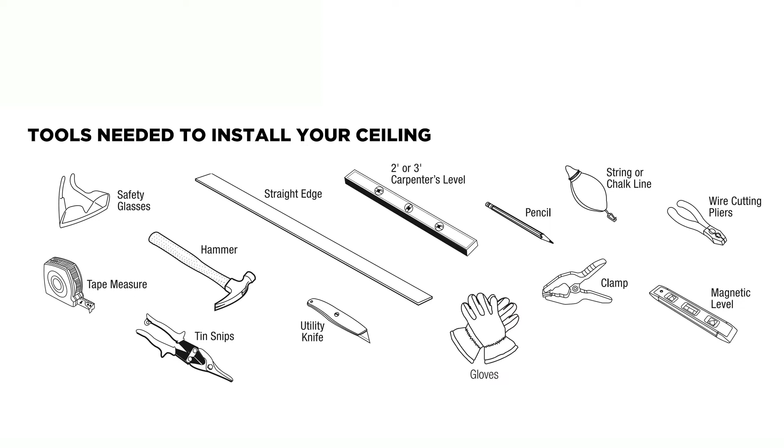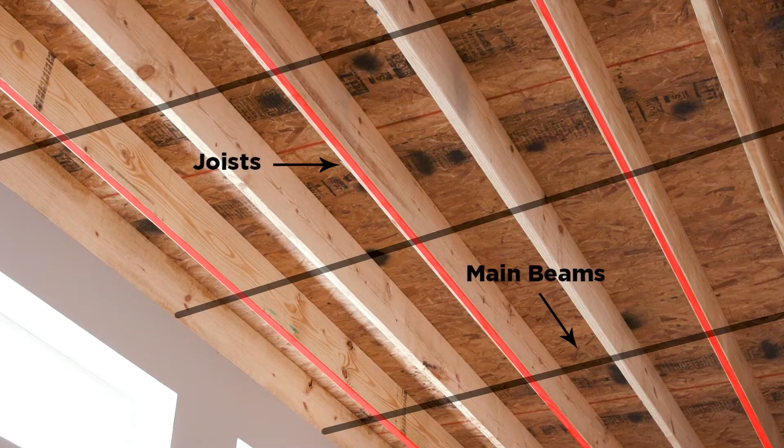Site preparation. Before beginning your installation, you'll need to identify the direction of the joists. Main beams typically run perpendicular to joists. If you have existing drywall, here's how to identify joist direction. Locate hidden joists using a stud finder or by tapping on the ceiling until you hear a solid thud. Mark this location. Repeat to locate remaining joists. Mark joist locations with chalk lines.

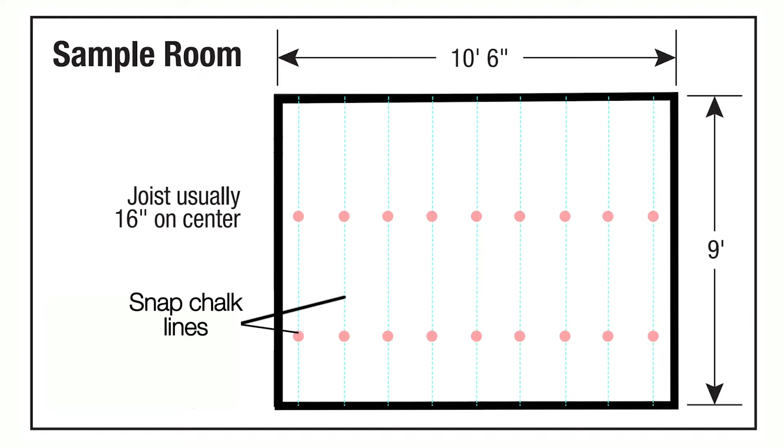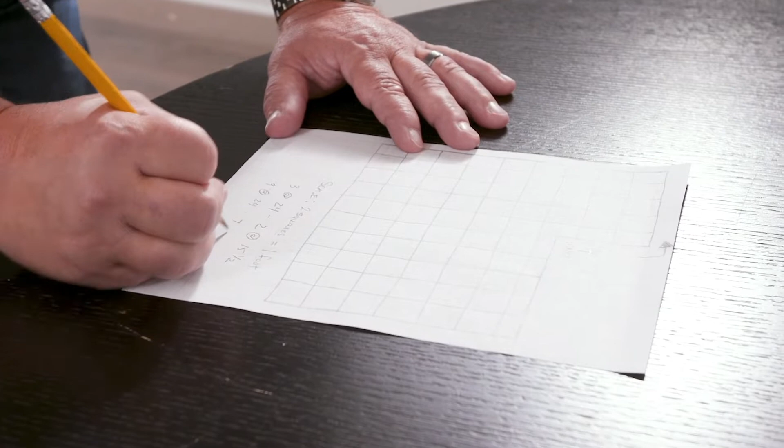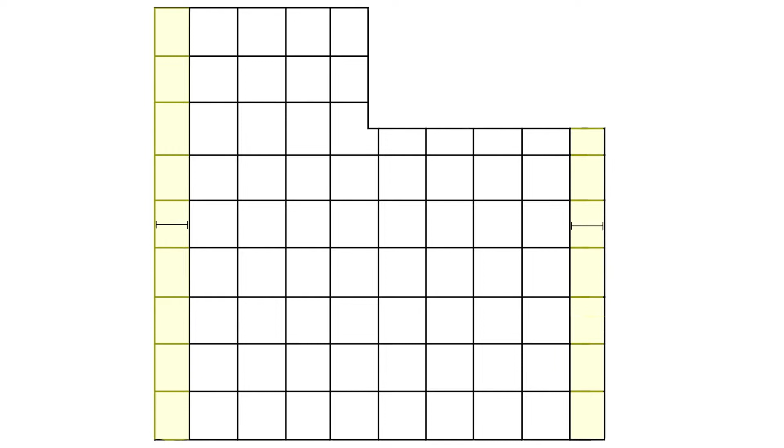Planning your layout. We recommend creating a layout of your ceiling before beginning your project. Visit the drop ceiling calculator on our website for additional guidance. For the best appearance, border panels should be the same size on opposite sides of the room and as large as possible. Use your room dimension and the following formulas to plan your space. Pause the video here to review the worksheets.

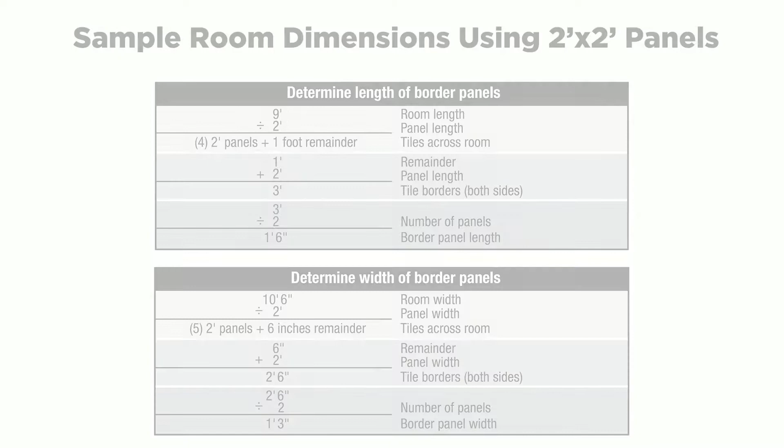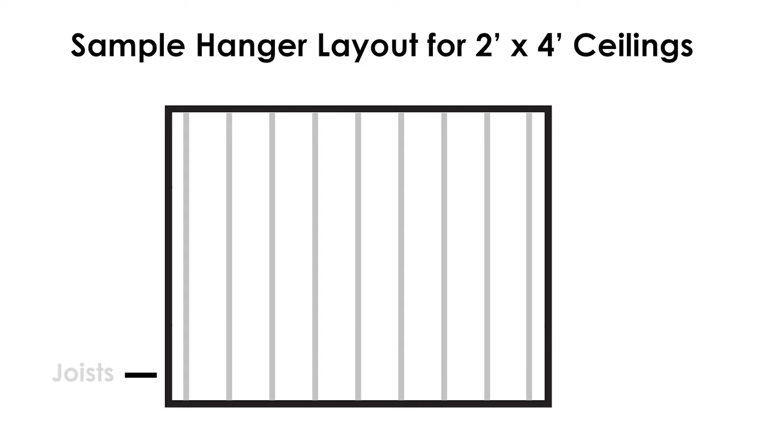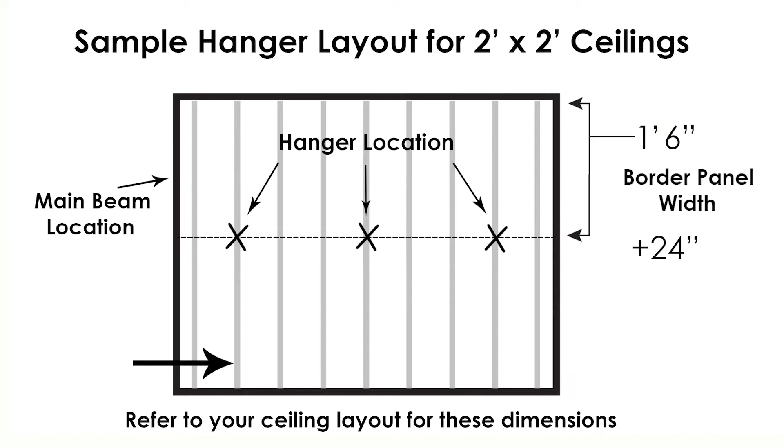Hanging point layout. Now that you have your tile layout planned, you'll need to lay out and mark your hanging points. These hanging points will support your main beams. The first row of main beams in a 2-foot by 4-foot panel installation should be hung the width of the border panel size away from the wall. In a 2-foot by 2-foot panel installation, the first row of main beams can be hung the width of the border panel or a border panel width plus 24 inches from the wall. Please refer to your ceiling layout for these dimensions. Remember, hanger locations should not be spaced more than 4 feet apart in any direction.

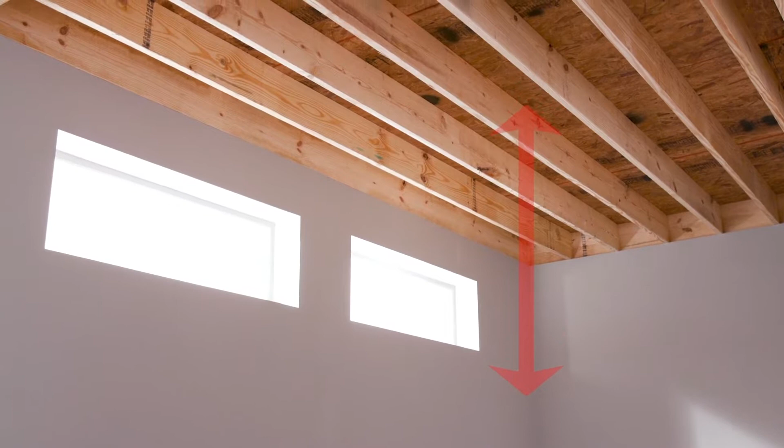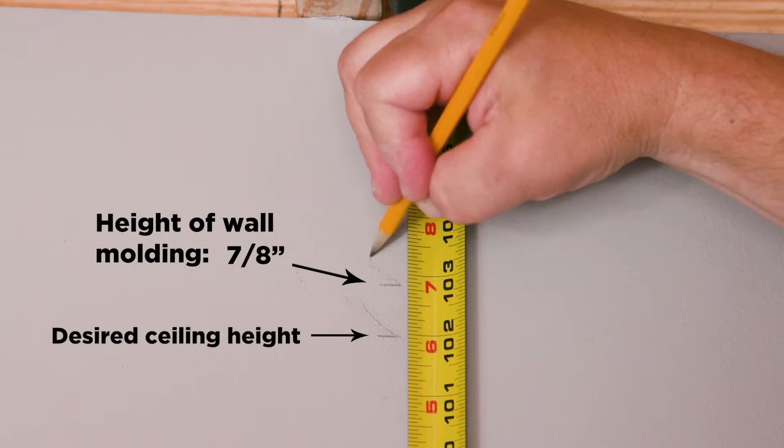Installing wall molding. The first step to installing your grid is establishing your ceiling height. For a typical installation, leave at least 3 inches below joists. This will allow you to get the ceiling panels in and out of the grid more easily. Identify your desired ceiling height. Then, add the height of the wall molding above the desired ceiling height. Mark a level line where the top of the wall molding will be on 3 walls. This will keep the marks from being visible after your ceiling is installed. Use a string line to mark the 4th wall. Doing this correctly will help ensure that your ceiling plane is level and flat. Tip: the easiest way to establish a level ceiling plane is with a laser level.

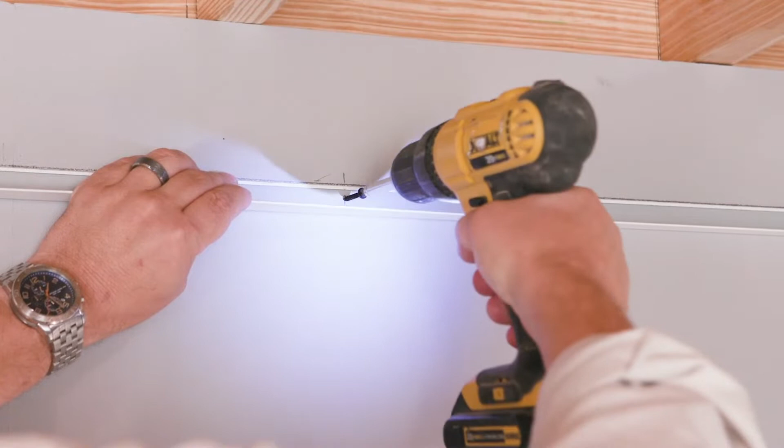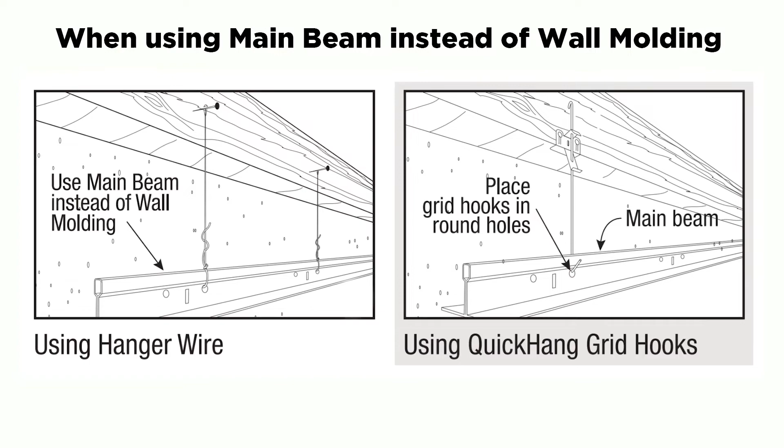Fasten the wall molding to the wall studs every 16 inches to 24 inches on center with the appropriate fastener for your type of stud or wall. If attaching the molding directly to the wall isn't possible, hang a section of main beam next to the wall as a substitute for regular wall molding. It will look the same when the job is complete. Wall molding corners can be created in 2 different ways. Butt joints are acceptable at inside corners. Outside corners should have a mitered joint.

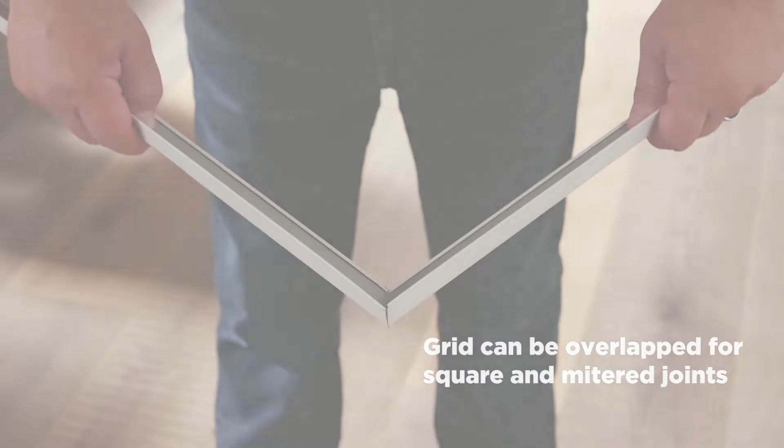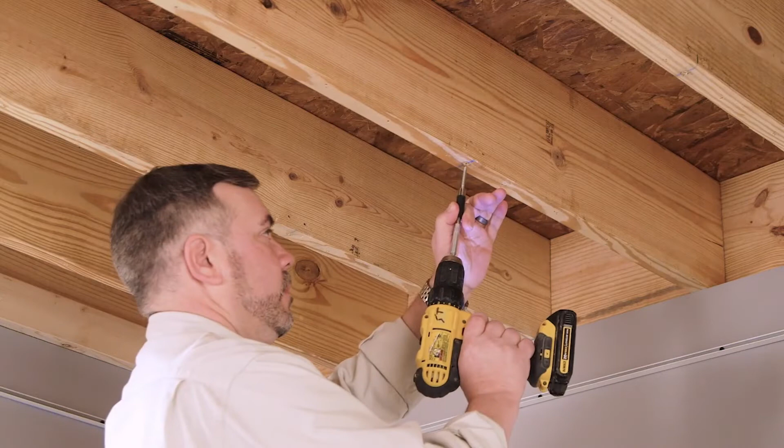Installing hanging hardware. Let's install the hanging hardware. There are multiple choices. Hanger wire. The traditional way to hang a ceiling is with hanger wire and fasteners. Identify the locations of your first main beam and snap a chalk line. Additional main beams will be spaced 4 feet apart. Screw the wire fasteners into the joists along that chalk line, a maximum of 4 feet apart.

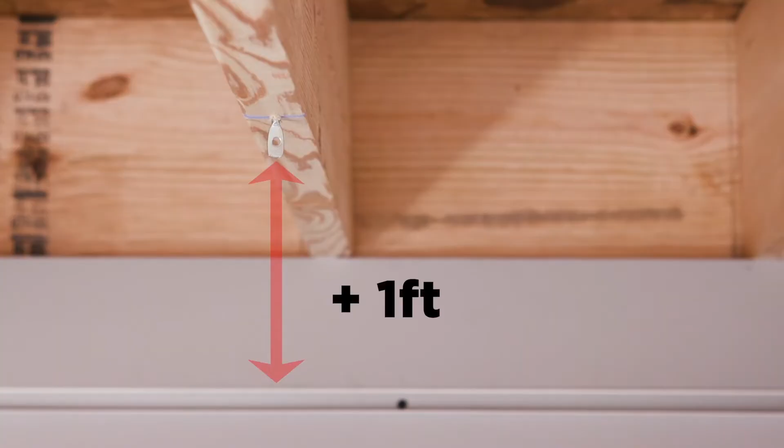Next, cut the hanger wire so that the length is the distance from your fastener to the top of the molding, plus 1 foot. Pre-bend the hanger wire 6 inches from the end. Thread the bent end through the fastener and wrap it around itself 3 times. The wire is now securely attached. Do this step for all remaining hanger locations.

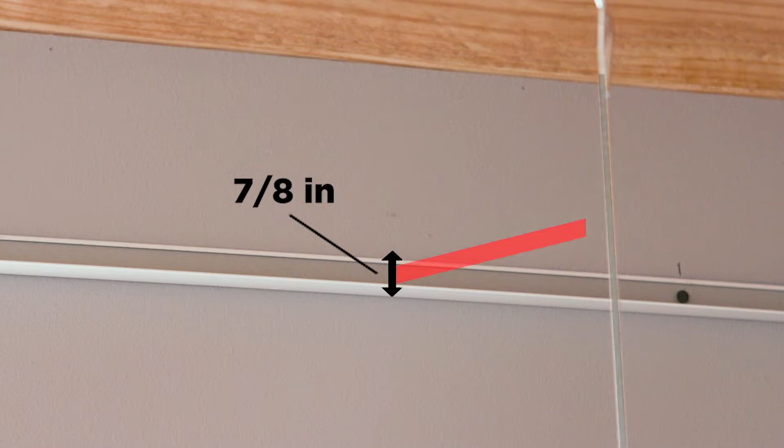Measure 7/8 of an inch from the bottom of the molding and in line with the hanging hardware. Drive a nail into the wall just above the molding. Do the same on the other side of the room. Stretch a leveling string from nail to nail along the row of wires. Swing hanger wires over to the string line and bend each one at a 90-degree angle where they touch the string.

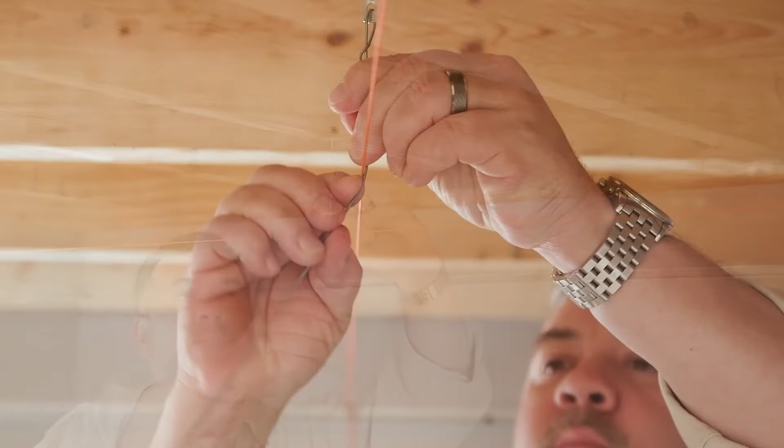Doing this consistently and accurately will help create a level ceiling. Stretch additional leveling string lines to pre-bend other hanger wires. Remove leveling strings after bending the wires.

Quick hang hooks and brackets. There are a few things to keep in mind when using the quick hang hardware. This hardware is designed to be a faster and easier way to install and level a ceiling versus traditional hanger wire. This hardware is for residential use only and is designed for use with solid wood or engineered wood joists.

Two hook options allow for ceiling drops from 2.5 inches to 6 inches and 2.5 inches to 12 inches below the bottom of the joists. The hardware is not for use on finished drywall ceilings. Plan your layout in the same manner you would using hanger wire. The quick hang hardware should be spaced 4 feet apart.

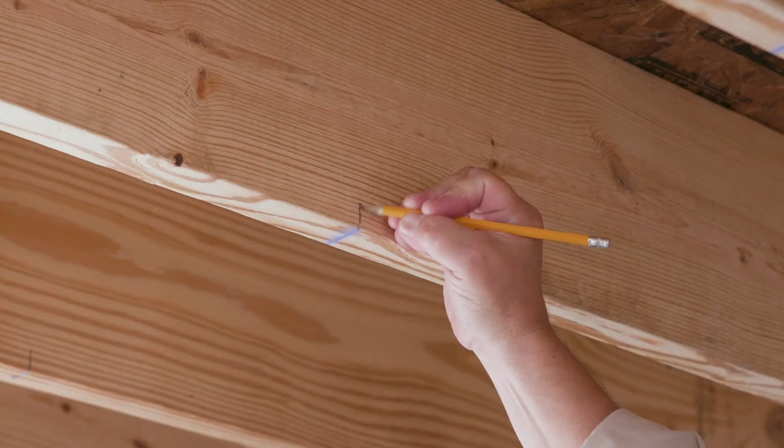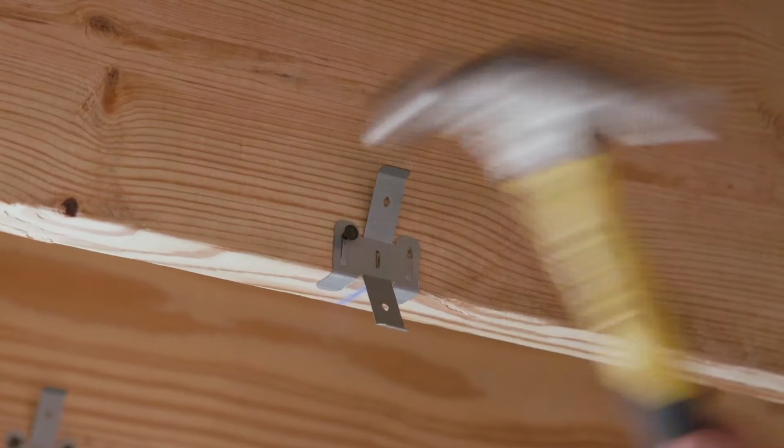Make 1-inch long vertical marks on the side of each joist where the bracket will be located. Use the center hole on the bracket for alignment with the vertical mark. Hammer in the 2 tabs for a temporary hold. Nail the bracket to the joist through the 2 openings above the hammer tabs using the provided nails. You can also attach the bracket to the joist using a single number 5 wood screw through the center alignment hole.

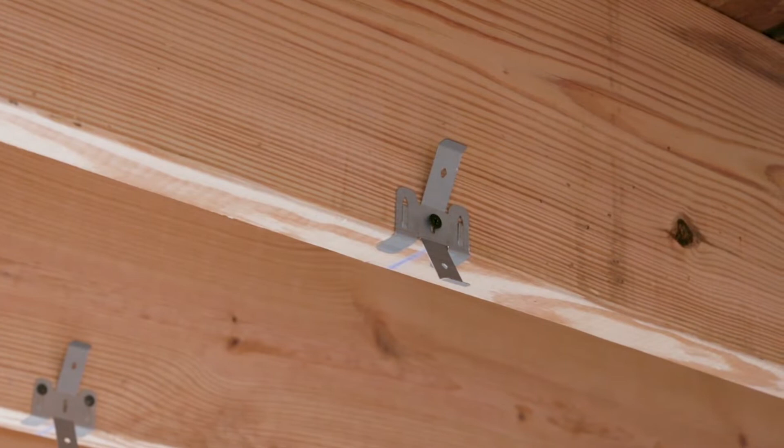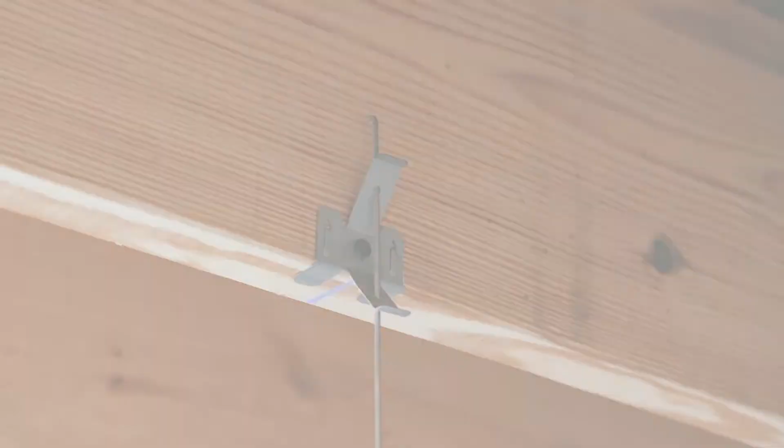With the brackets securely attached to the joist, insert the grid hook using the diamond-shaped holes in the brackets. Thread the small end of the hook from the back through the lower hole. Push the hook up and rotate to thread through the upper hole, squeezing the spring tabs to allow the wire to go through. Do not cut quick hang hooks. If the hook needs to be shortened due to an obstruction, the top portion can be bent by hand or with pliers. Turn all hooks in the same direction, parallel to the joists.

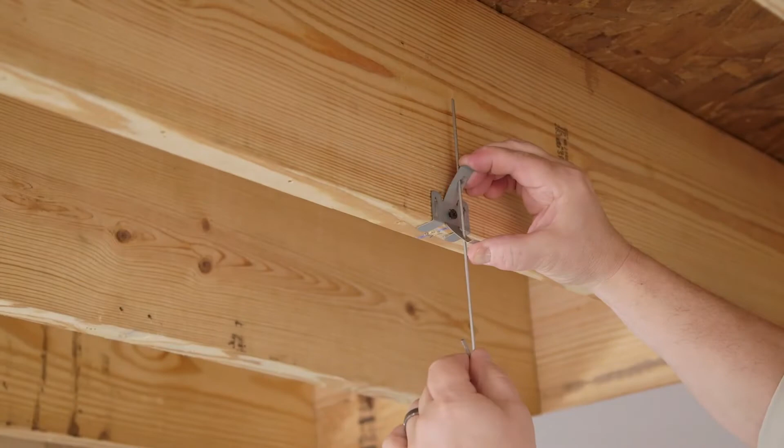Set the hooks at about the same height. The bottom of the hooks should align with the top of the wall molding. To adjust the height of the hook, squeeze upper and lower spring tabs while lifting or lowering the hook. You will do final leveling once all of the grid is installed.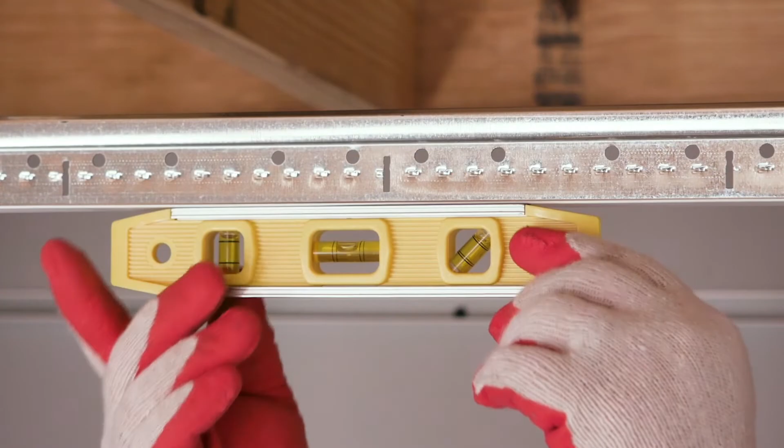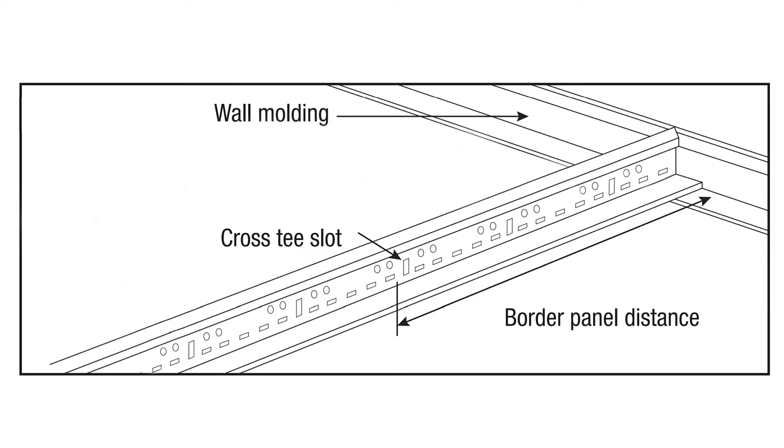Preparing and hanging main beams. You will need to trim the end of the first main beam so that a cross tee slot is a border panel distance from the wall. This first main beam should be closest to the wall. Cut the top of the grid first with tin snips, then bend the grid open and cut the face.

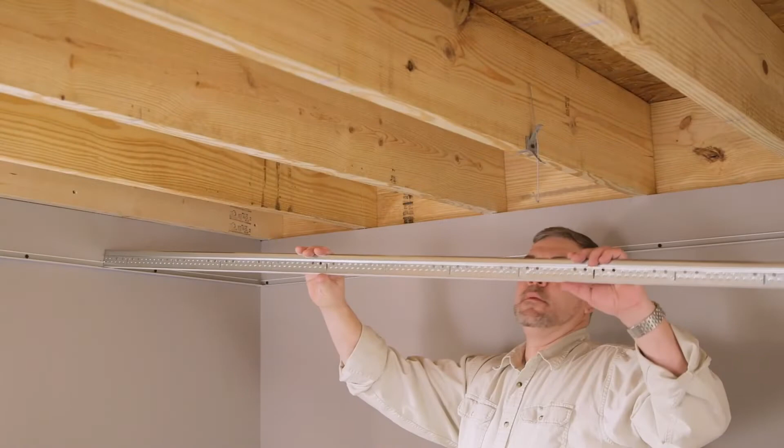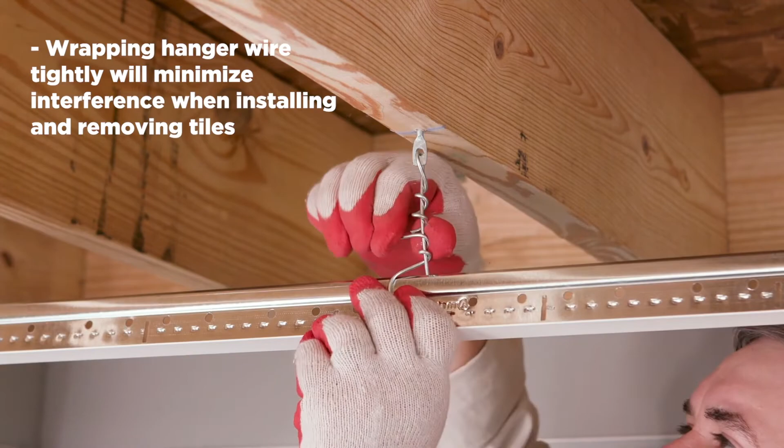Place the cut end of the main beam on the wall molding and, using the round hole in the grid, hang the main beam on the hanger wire or quick hang hook. For installations using hanger wire, you will need to bend the wire up and wrap it around itself 3 times. If the holes don't line up, re-bend the hanger wire to align with the nearest hole. Check to make sure your grid is level after rebending the wire. Do this same step for the next main beam, running parallel 4 feet away.

Preparing and cutting border cross tees. Stretch a string line from one end of the room to the other, below the wall molding and along the edge of the main beam furthest from the wall of the first main beam. Your first border tee will be positioned a border panel's distance away from the wall. If your main beam is cut correctly, there should be a rectangular slot at this location.

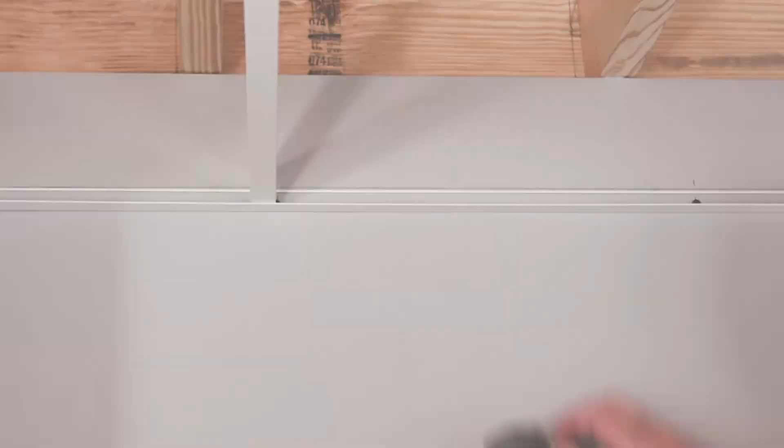To cut the first border tee, hold the end of the cross tee against the wall, and then mark and cut the cross tee where it intersects the string line. Insert the uncut end of the cross tee into the main beam through the rectangular hole and rest the cut end of the tee on the wall molding. Repeat these steps for the second border cross tee. You can temporarily fasten the cross tees to the wall molding with a clamp to keep them steady while you square the grid.

Squaring the grid. To achieve the best results, it is important to make sure your grid is square at this point in the installation. This will allow you to adjust if changes are required. Before checking for squareness, you should first install two 4-foot cross tees between the two main beams in line with the first two border tees.

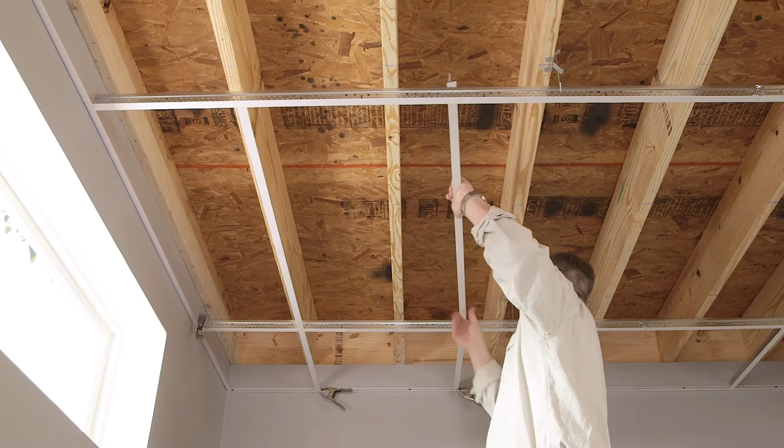When connecting two cross tees in the same rectangular hole in a main beam, insert the second tee into the slot by passing on the right side of the already installed cross tee. Installing a cross tee is easier if the tee is inserted into the rectangular slot at a downward angle from above the grid plane. Listen for an audible click to ensure a good connection.

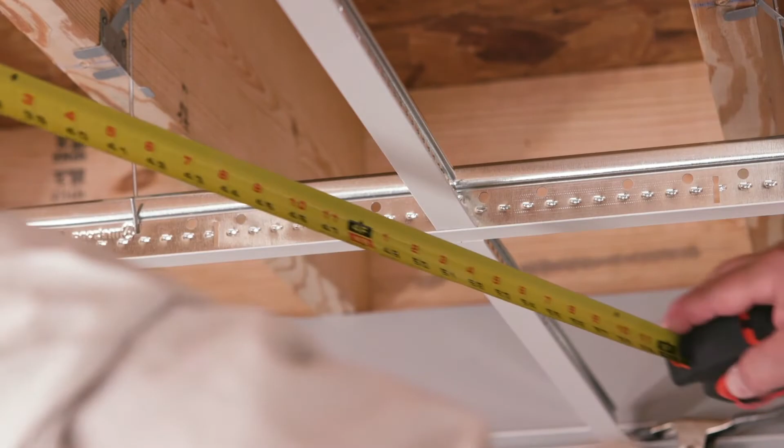To check that your grid is square, measure across the diagonal of the 2-foot by 4-foot opening. The measurement will be the same if the grid is square. If the measurements aren't the same, trim one of the main beams until the diagonals are equal.

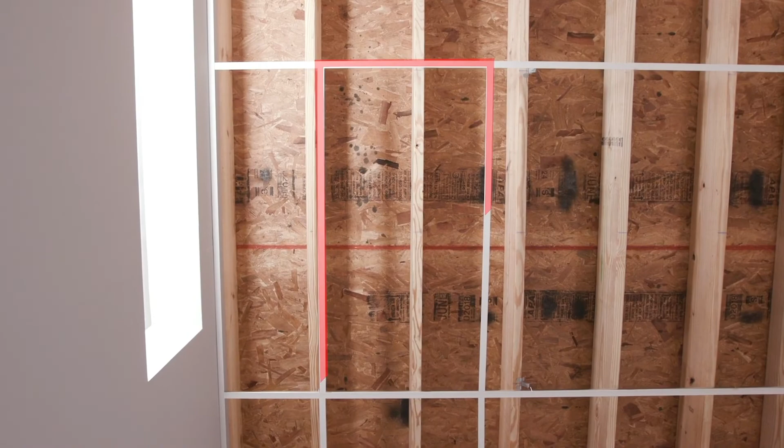Installing remaining grid. Once your grid is square, complete the first two rows of main beams by hanging additional main beams from the hanger wires or hooks and joining their ends together. Listen for an audible click to ensure a good connection. At the far end of each of these two rows, you'll need to cut both main beams so they rest on the wall molding. Now install all remaining main beams.

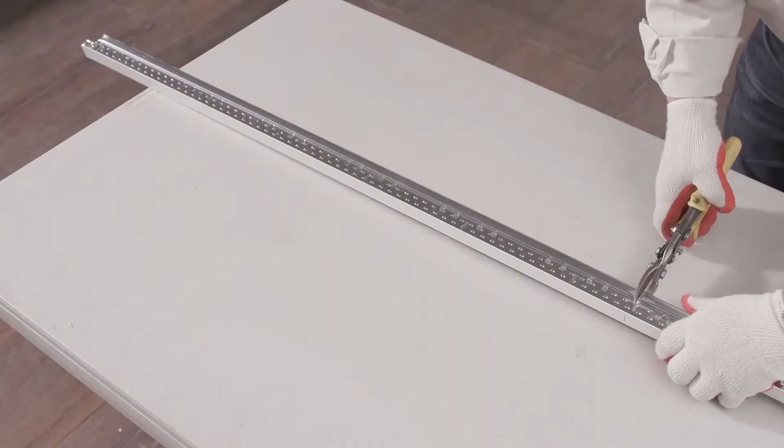Use the leftover ends of the cut main beams to start additional rows of main beams. You will need to trim all starting main beams so a cross tee slot aligns with your already installed cross tees. Installing a second guide string perpendicular to your first guide string and in line with your first row of cross tees will help identify where you need to cut all remaining main beams. Cut and install all remaining border cross tees.

Remove the clamps. To lock your grid in place and maintain squareness, we recommend attaching a few cross tees to the wall molding with either screws or pop rivets. Now install the rest of the cross tees, starting with the 4-foot cross tees running perpendicular to the main beams. Install these cross tees 2 feet apart to create a 2-foot by 4-foot opening. If you are doing a 2-foot by 2-foot ceiling installation, install 2-foot cross tees at the midpoint of the 4-foot cross tees.

Final leveling. If using hanger wire, your grid should be level at this time. Check by using a magnetic level. Unbend and retie wires if adjustments are required. If you are using quick hang hardware, start with your first installed main beam in the corner of the room with a magnetic level and adjust as needed. Continue working your way across the room by squeezing the adjustable tabs and raising or lowering the hooks until your system is level.

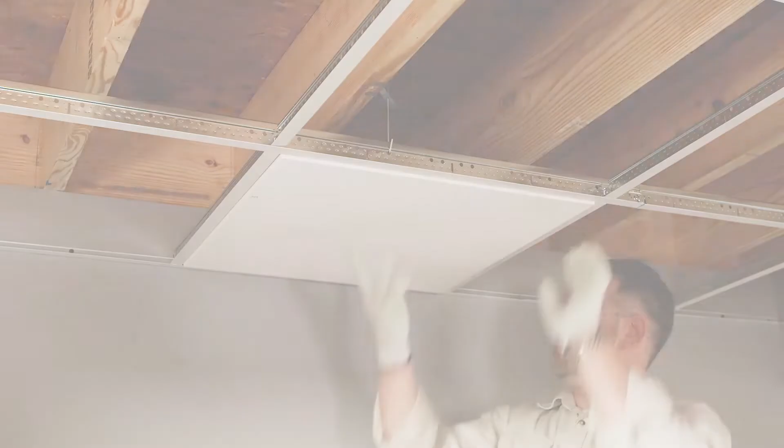Installing ceiling panels. Wear clean gloves or wash your hands before you handle the ceiling panels to prevent dirt smudges on the tiles. Lift the panel at an angle up through the grid. Gently drop into place. Remember, mineral fiber panels can be delicate and should be handled with care. Avoid dragging the face or edges of the panels against the grid.

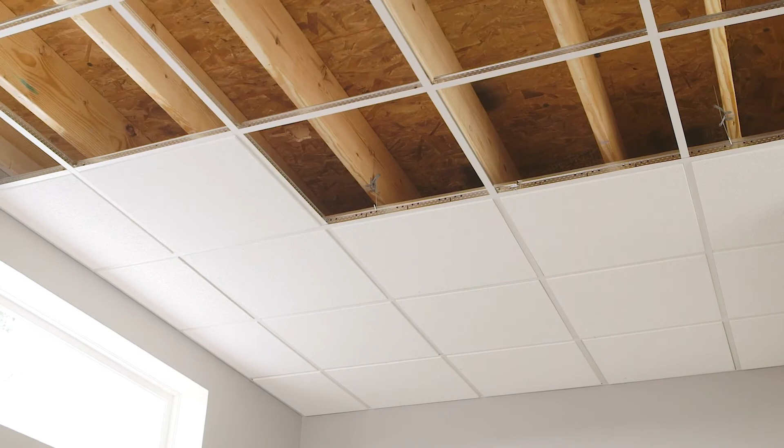Start with border panels and work towards the center of the room. If a tile cannot be installed in this manner, an adjacent cross tee can be removed to allow the tile to be positioned. The cross tee should then be reinstalled. If there's an obstruction in the area where you are inserting a ceiling tile, you may need to lift the ceiling tile through an adjacent opening and gently move it across the back of the grid into place.

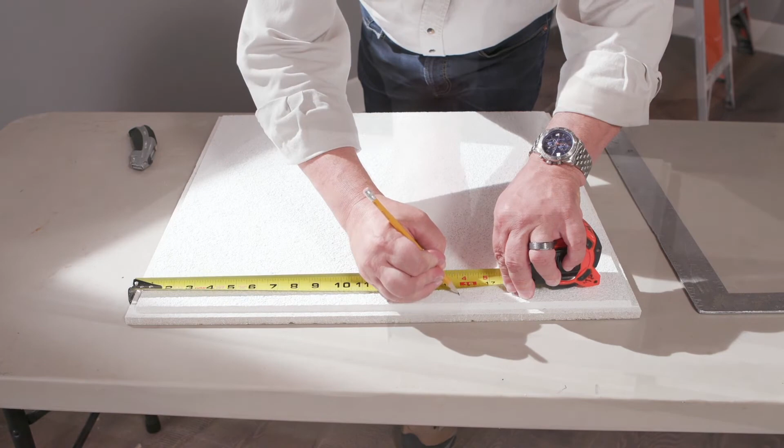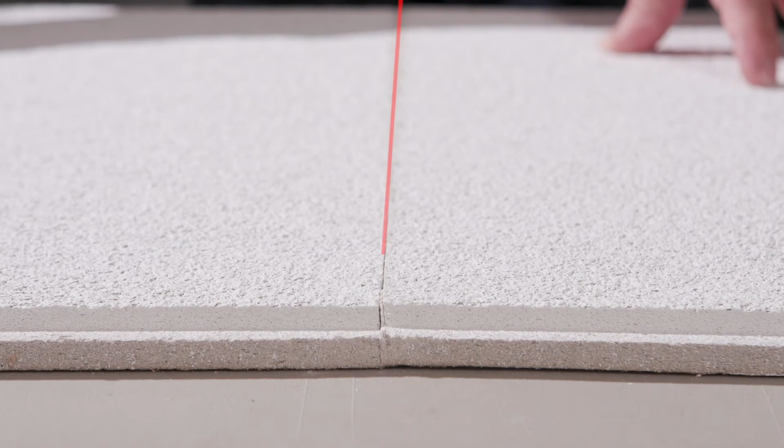Cutting border tiles. Border tiles will likely need to be trimmed. Use a straight edge and cut the panels face up. For Tegular edge tiles, you will need to cut the edge that's resting on the wall molding to allow it to lay flat. Cutting Tegular edge tiles. First, trim Tegular edge border panels to the same dimensions as for flat panels. The Tegular edge must now be cut into the panel.

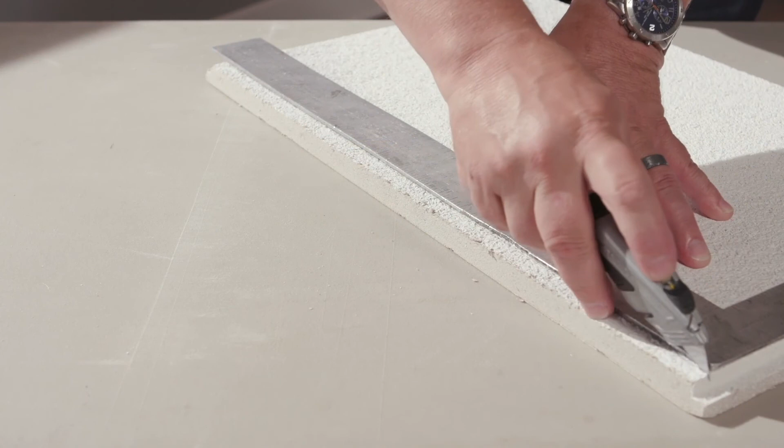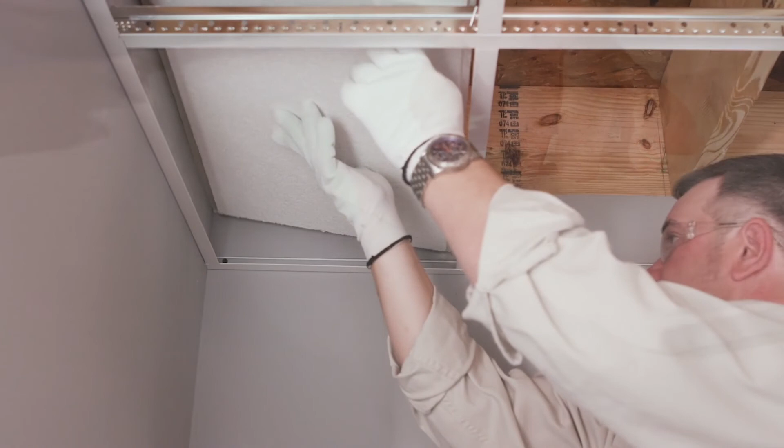Set the panel into the grid face side down. Draw a light pencil line on the panel using the wall molding as a guide. Remove the panel. Use a sharp utility knife and straight edge to cut halfway through the panel from the face side along the pencil line. Lay the utility knife on its side next to the panel and, with the panel face up, cut into the panel at the Tegular edge height to the depth of the first cut. Discard the cut material. If the cut edge of the panel is still visible when installed, paint with a flat white latex paint and install.